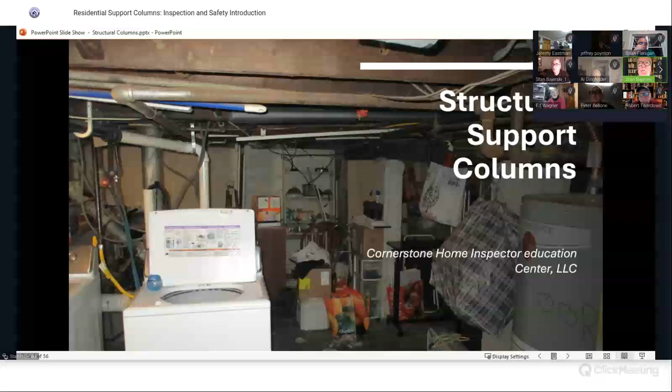Tonight we're going to talk about something that we may take for granted sometimes, but structural support columns, we see them in almost every home. So we're going to talk a little bit about them tonight.

Oh, I can control this today.

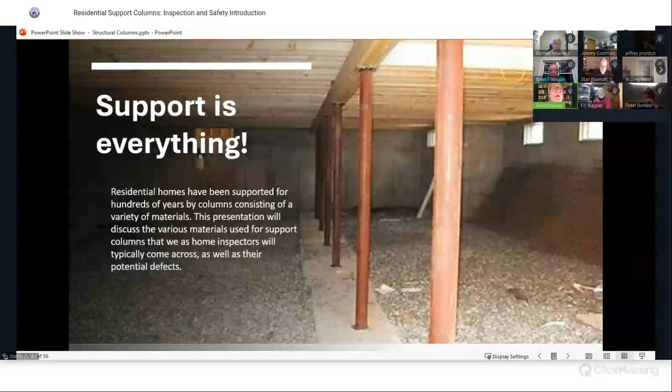All right. So support is everything. Residential homes have been supported for hundreds of years by columns consisting of a variety of materials. This presentation will discuss the various materials used for support columns that we as home inspectors will typically come across, as well as their potential defects. Column material: wood, brick, concrete blocks, steel. There's generally two kinds: concrete filled and the adjustable.

Stan, hold on. Raymond, you need to mute your microphone. Will guide us. And Raymond, please mute your microphone. Got it. Thank you. Go ahead, Stan.

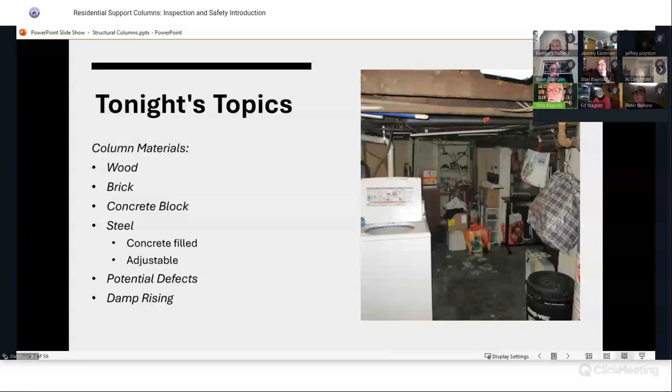And then potential defects and damp rising, which is a term you might not know, you may know. We're going to talk about that in a little bit more detail towards the end of the presentation. So a column for our purposes is defined as a supporting pillar, especially one consisting of a usually round shaft, a capital, and a base, a colonnade of marble columns. Well, they're not all like that, but that's what the definition is.

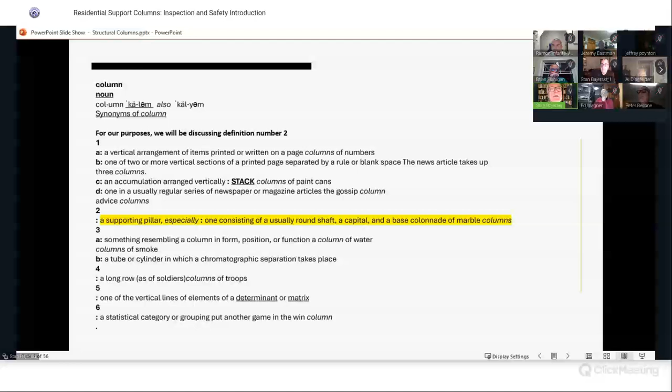And ancient Greek architecture came from the Greeks or Hellenics, whose culture flourished on the Greek mainland, and their architecture was pretty dominant with columns, as you can see here. They're decorative, but they also serve the purpose structurally. There's three orders of Greek architecture: the Doric order, Corinthian, and the Ionic orders. They were all heavily into ornate columns, so they date back quite far.

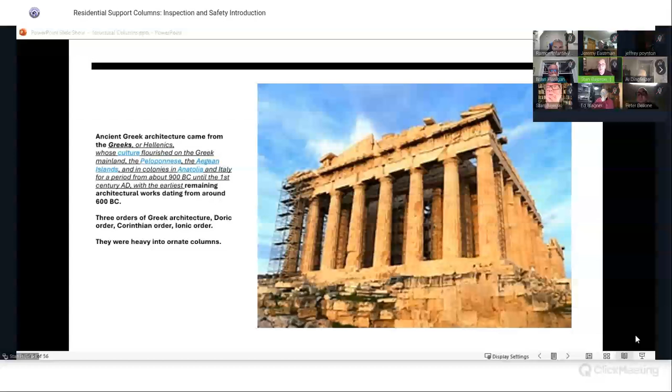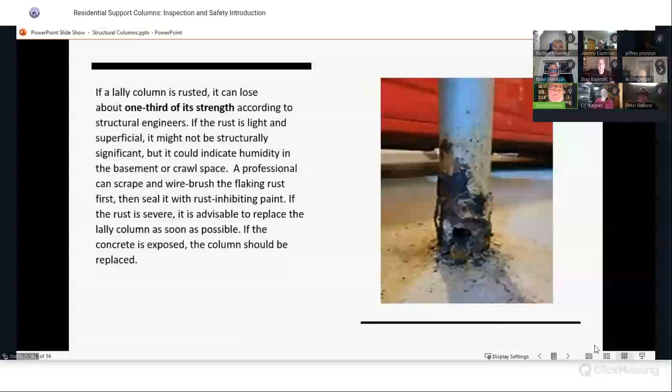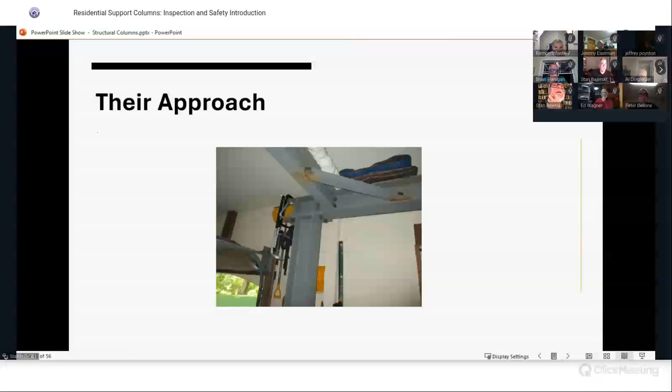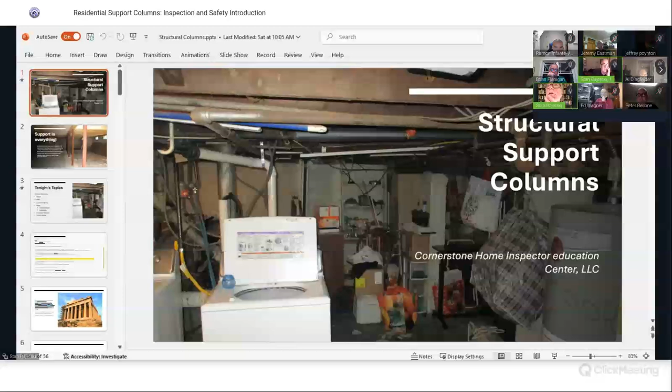All right, why is this not moving now? Jim, am I locked up here? There you go. Try it now. Try your keyboard. That's what I'm using. Okay. There you go. I got it. Hold on. Let me make sure. Yeah, you're good. Yeah, but I got to go back to where I was. Hold on. There you go. Go back the other way. Am I going the wrong way? Yes, go back the other way. There you go. Holy shit. So, yeah. Sorry, guys. Going the wrong way. There you go. So just click forward a couple. Why is my keyboard not working? All you're going to do is use your little arrow.

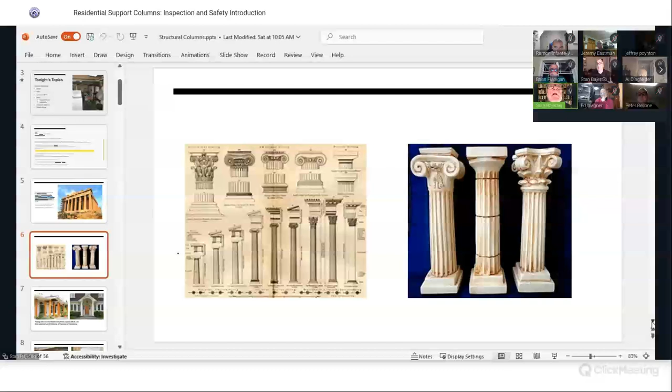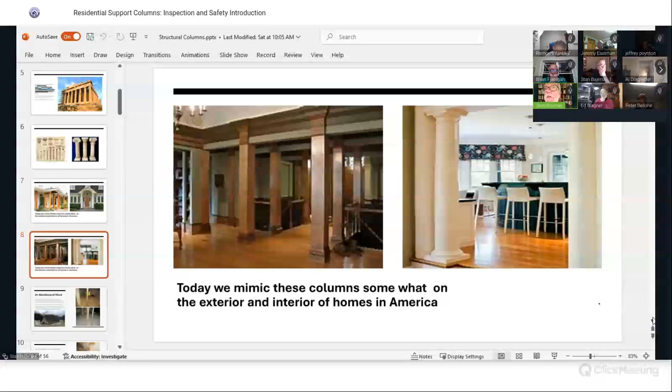There you go. Okay. Here's some pictures of the columns back then. Three different types there. Today, we mimic these columns somewhat on the exterior and interior of homes in America. Interior columns, a lot of these are probably structural, lined up over a girder in the basement. Others are just there to create the architecture that they're looking to simulate. We've probably all seen some similar to these in the early 1900s houses with the archways and openings. And back then, those weren't really exotic houses. They just put a lot of these things in there to carry over the old-time architecture.

Wood is one of the longest standing building materials in existence, with evidence showing homes built over 10,000 years ago using timber as primary source for construction material. Europe's Neolithic longhouse, a long, narrow timber dwelling built in 6000 BC, is an excellent example. As one of the largest buildings during that period, the Neolithic longhouse was solid and massive with a capacity of housing around 30 people. And this was all supported by wood columns and wood timbers.

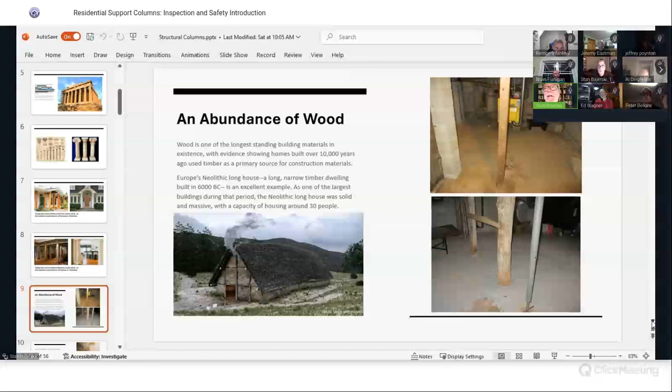And we'll see in early homes a lot of wood columns. Sometimes they have been replaced or working with replacement columns or additional columns. Here are some of the originals in this house. They were just timbers, bark taken off and slapped into place. And they probably still are functional. I still see them a lot in some of the beach cottages that I crawl under here on the coastline in Connecticut. They're usually cedar, and a lot of them are still in place, believe it or not.

So we as home inspectors see wood columns in homes built into the 1930s. Many are the originals and are faring well. Most concerns for wood columns deal with moisture and insects. If the base of the columns begin to rot due to chronic dampness or seepage, they will compress and the structure will follow. Insect damage can compromise a wood column as well.

If I had to guess, I probably see more decay problems with wood columns than insects. I do know I've seen insect damage to columns more in crawl spaces than basements. While the majority of wood posts are still functional, many inspectors advise that they be replaced with steel lally columns.

I would have to see the condition of the columns and the structure to decide if I wanted to make that recommendation. I'm going to say probably 80% of the time they're going to have some type of water staining or dampness staining on the bottom. So you got to probe them, see if they're solid, and then go from there with your recommendation.

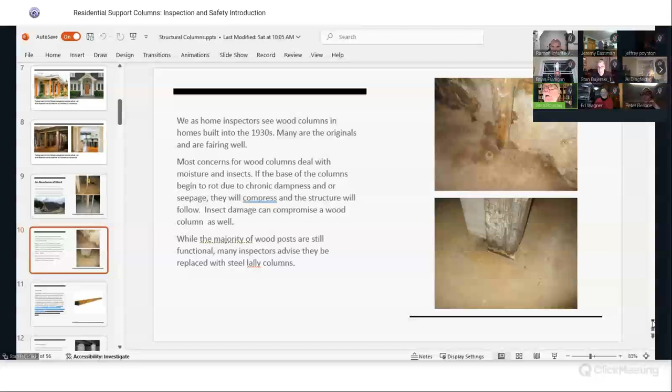Versalam columns, laminated veneer columns manufactured by Boise Cascade. They are highly suitable for wood columns. They have the same properties that make Versalam beams great. They are free of deep checks, cracks, or twists that can plague solid wood columns. The allowable axial load for the Versalam columns varies depending on the size of the column and length of the column. You can find more information on Versalam columns on the Boise Cascade website.

So several years ago now, Scott and I got a call from a realtor that I worked with who manages a few properties as well. Her owner lives in Florida, and there was a rental property in West Haven, and one of the tenants said the addition was falling, and she asked me if I would go take a look at it. So Scott and I did.

So there was an addition off the side of the house, 2-story, and it did appear that the floor joists were pulling away from the main. Actually, it wasn't even a girder; it was the sill box that was the original part of the home. So we decided to build a girder under those floor joists, and we used an engineer to spec out everything for us. And he chose these guys as the columns. We had 3, I believe, across the length of that house; it was a 24-foot span, and we put 3 columns up.

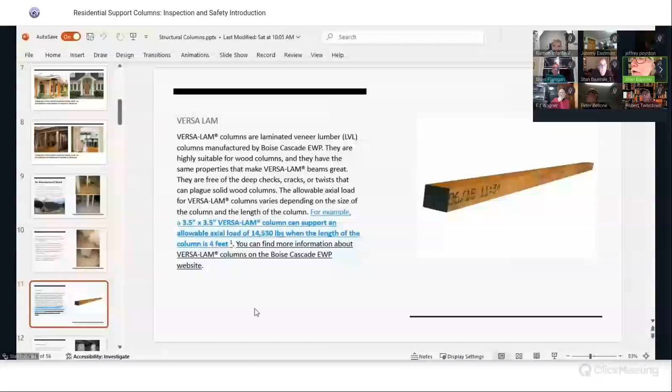You have to have the engineer make that correction. And I said it's going to cost more money for this woman, and I don't even have to get a permit. I can do this job without a permit. And he approved it and gave it back to me, and we put that all in. And it wasn't the beam he was concerned about. It was the strength of the concrete, which was just an error on the engineer's part. So sometimes you have your way with the building department as well. You don't get in their face, but you kind of tell them where you're coming from.

So concrete block I see a lot, especially in crawl spaces like this, and they usually look pretty suspect for the most part, and they are built up usually with different sizes of block and then wood shims because the floor is never level, so they're always going to be different heights. That's another thing that you have to kind of look at, and you have to get a feel for whether that's going to be substantial or not. How old is the house? How long has this been here?

Concrete block columns are used as load-bearing components inside the perimeter of the home. These columns are usually made of concrete masonry units. We commonly refer to them as concrete block or cinder blocks. The lifespan of concrete columns can vary depending on the type of the concrete used, the quality of the installation, and the environmental conditions they are exposed to. Precast concrete columns are designed to have a lifespan of 50 years. However, the lifespan of concrete masonry units used in older homes can be much longer, up to 100 years or more.

It is important to note that the lifespan of concrete columns can be affected by factors such as moisture, temperature, and exposure to chemicals. If you have any concerns about the structural integrity of your concrete columns, it is advisable to consult a professional contractor or engineer. So that's something that we also do, right? We recommend that when we're not sure of how things will fare.

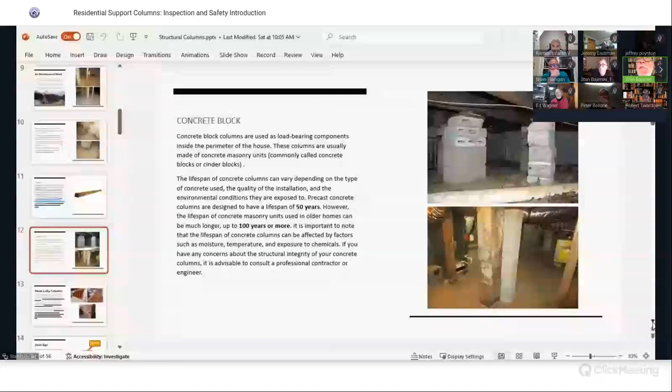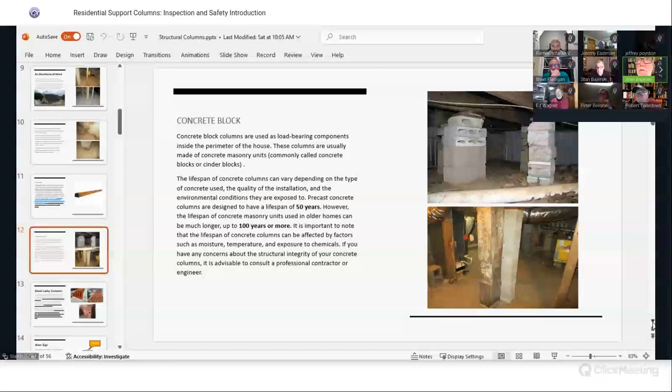That picture on the bottom is just sistering that original wood column with a block column, and you can't really see it, but there's brick at the top of that to take up the space where the columns didn't reach the girder.

Steel lally columns. The most common column in modern construction is the lally column. A lally column is a type of structural support column that is used to provide support to beams or timbers stretching over long spans. It is typically made of thin-walled steel and filled with concrete.

Lally columns can be used temporarily to hold up extremely heavy structural weight when performing other repairs, such as major wall remodels or installation of new windows or doors. Permanent lally columns are sometimes installed to correct structural problems as well. The oldest form of lally column is a non-adjustable steel column cut down to size and filled with concrete. However, the term has come to encompass many other iterations of mobile steel columns.

Adjustable steel columns, telepost, jack post. Adjustable columns consist of two telescoping steel tubes, one inside the other, that adjust upward or downward to temporarily or permanently support an unsupported joist or beam. There are also three-piece as well.

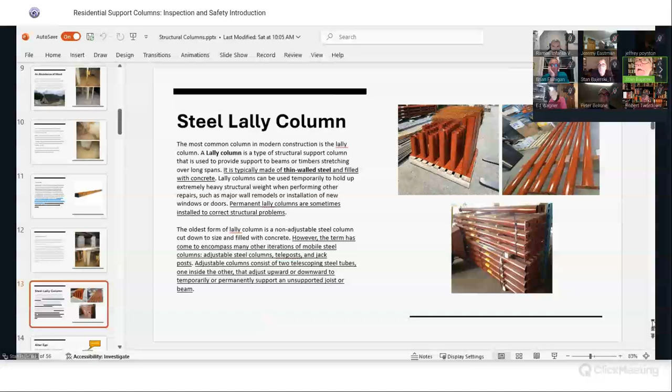These are just a stack. You see the different sizes that you can buy. You can buy one big long one, cut them down to where you want. They're not easy to work with, and you better be precise when you cut those down if you're installing them to replace an existing column. The wood was easy to work with, the lam beam.

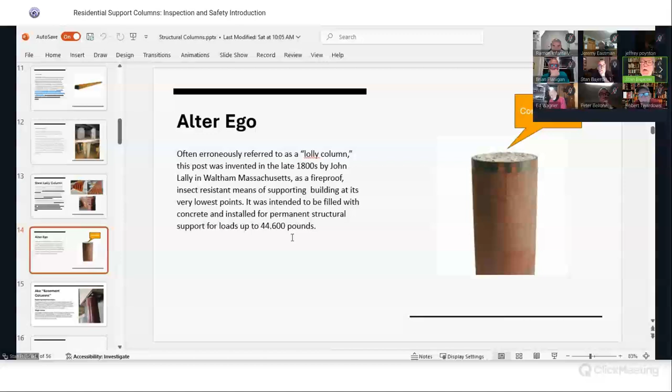Lally columns have an alter ego. Lots of people refer to them as lolly columns. And this post was invented in the late 1800s by John Lally in Waltham, Massachusetts, as a fireproof, insect-resistant means of supporting buildings at their very lowest points. It was intended to be filled with concrete and installed for permanent structural support for loads up to 44,600 pounds. That's a lot of weight.

So now a lot of people call them basement columns, although they're not always located in a basement. The basement columns are there to support the dead and live weight of the internal parts of your home above them. You might not realize this, but basement metal columns hold tremendous loads. A 4-inch steel column at 6 feet in height can support more than 20,000 pounds, which is a lot of weight.

That weight is the dead weight of the flooring, the floor joist, and the joist girder beam, plus the live weight of furniture and the house inhabitants. The load of the floor goes to the joist, then from the joist to the joist girder beam, and through it to the basement beam and into the foundation and the walls.

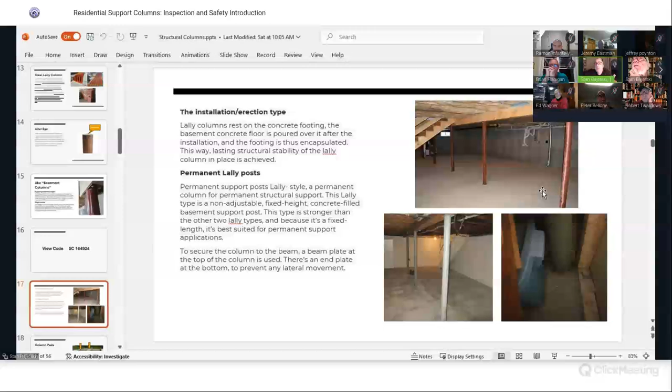It depends on what you're trying to hold up. If a floor joist is sagging, there's no weight on top of that floor joist. There isn't a piano causing it to sag. So if you're just trying to push up a floor, you probably don't need a footing. Gotcha. Because you're in a basement, my understanding is you don't have to worry about freeze and thaw, so you don't have to go 48 inches like you would for a deck outside. No, it's just a pad. Okay. All right. Thanks.

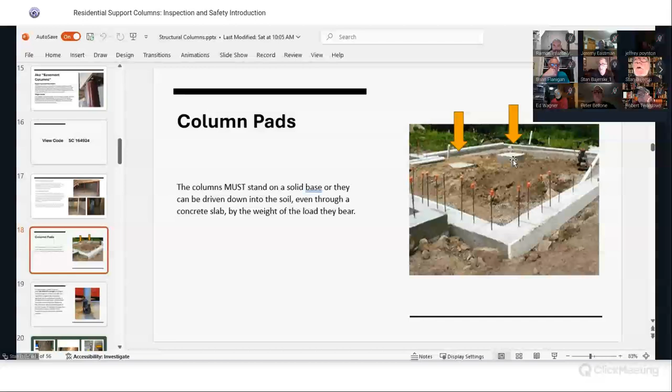Just like this. This is a bad example, I couldn't find a better one. It doesn't really give you any depth or dimension, and it looks offset, but it's the only picture I could find to depict what we're talking about. This is where the columns would go, I'm guessing. Because if we don't have something to hold them up, you'll drive them down.

So if the Lally column is rusted, it can lose about 1/3 of its strength, according to structural engineers. If the rust is light and superficial, it may not be structurally significant, but it could indicate humidity in the basement or crawl space. A professional can scrape and wire brush the flaking off first and then seal it with a rust-inhibiting paint. If the rust is severe, it is advisable to replace the Lally column as soon as possible. If the concrete is exposed, the column should be replaced.

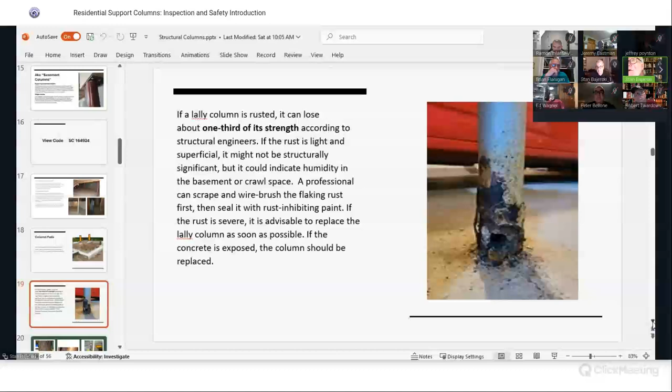So I kind of live by that. If I see concrete exposed at the base of a column, I'm writing up that that column has to be replaced. A little bit of rust is not a big deal, but why is it rusted? So this is in a garage, you can see the car. Water, snow melt, probably hitting that column all winter long, or even summer. At least you know what the source may be here. I've got a picture, so we'll wait until we get to that.

If you walked into that basement looking for evidence of dampness and seepage, you didn't see much there. But where is this water coming from? It's being wicked up from underneath that slab.

Is this going to continue and become worse? Unfortunately, I don't remember how old that house was, so how are we supposed to know that? How do you want to write that up? If it gets worse, replace it.

One way to handle that, if you think moisture's under that slab, is put a sump pump in and try to collect that water and pump it out. But then don't you think you'd see water efflorescence someplace else as that slab got wet? So these kinds of things are a little tricky when you see them, as to determine how that water got up there, but it's definitely wicking, and this is just pretty bad right there.

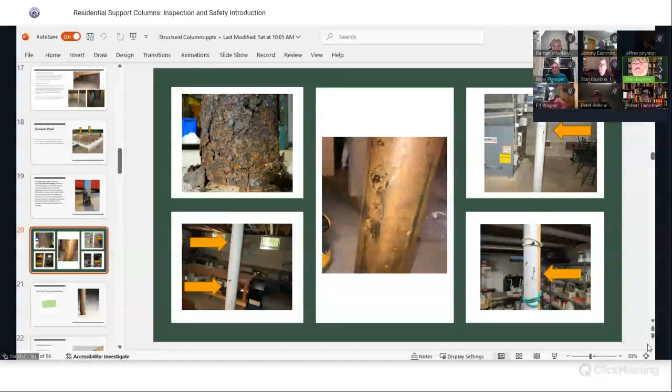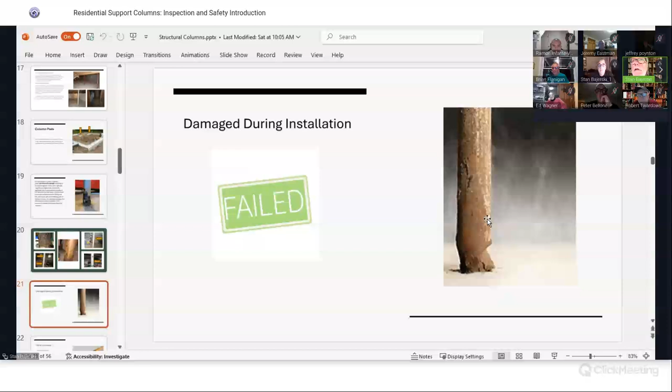Damage during installation. Somebody sledgehammered this thing to get it into place, it looks like. And that's a failed column. It's not supporting 100%. That should be replaced.

Other concerns besides rusting and damaged columns: spacing of the columns. Typically a steel column is placed every 8 feet on center in a wood frame 2-story residential home. I used to think they were all supposed to be under a splice, but when you look at some of these, the splices are offset.

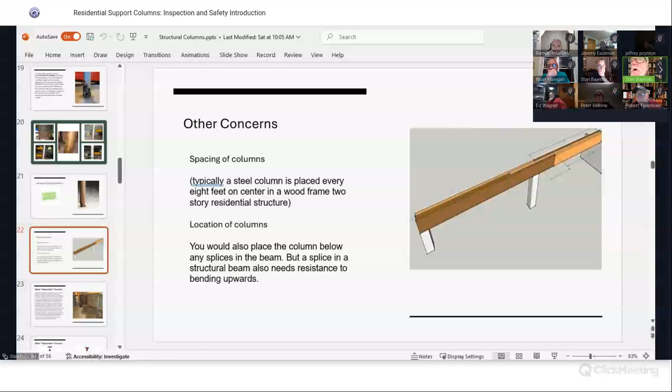And if you support it at the wrong spot, the wood can kind of lift, so you also need to be resistant to bending that splice upwards as well. It's not a big deal, but it'll be a little hump in the floor. You may feel it as you walk through the house.

I don't know how many times people find steel Lally columns problematic unless they're badly rusted, but I see adjustable columns a lot. And if they're under, like I was talking with Jim before, underneath the floor joist, or an area like if you walk through a dining room and they have a china closet.

So I'm a big guy. When I walk through a room that has a china closet, those 2x8 floor joists are shaking the shit out of those dishes.

It's not a structural issue, because if you wanted to do the calculations, that 2x8 was probably fine. But every floor joist is weakest at its center, and it's going to vibrate. So you can put a couple of these underneath there if you don't mind compromising the open space of your basement, and it'll take that vibration out.

But when you're supporting the house with one of these or several of these, then the concern develops. Telescoping columns designed for use in the United States, also known as teleposts, sectional columns, double section columns, jack posts, or jacks, should be reported as temporary columns that should be replaced with permanent columns.

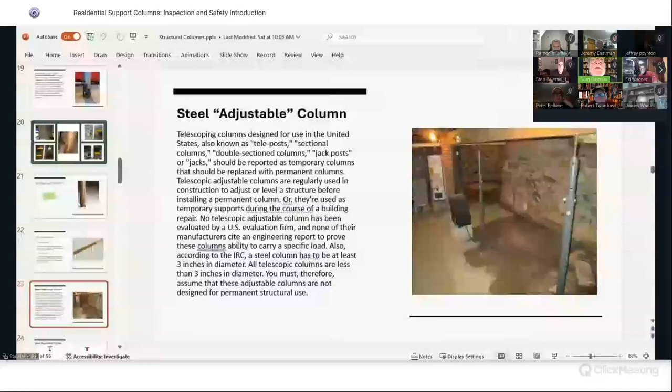Telescopic adjustable columns are regularly used in construction to adjust or level structures before installing the permanent column, or they're used as temporary supports during the course of building repair. No telescopic adjustable column has been evaluated by a U.S. evaluation firm, and none of their manufacturers cite an engineering report to prove these columns' ability to carry a specific load. They're basically a tool.

Also, according to the IRC, a steel column has to be at least 3 inches in diameter. All telescopic columns are less than 3 inches in diameter. You must therefore assume that these adjustable columns are not designed for permanent structural use. I have pictures at the end that'll show you what can happen with them. But if this isn't 3 inches, this certainly is not. And that's what we're supporting.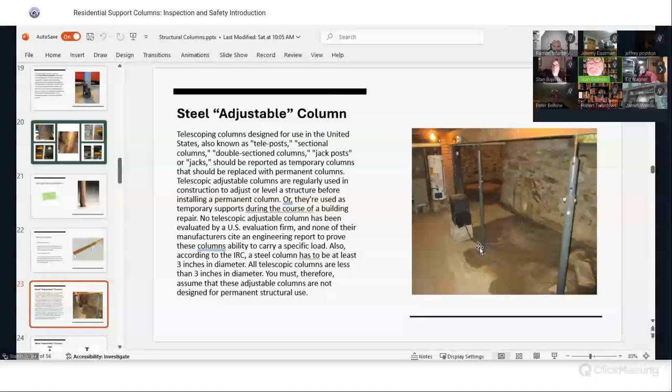This was one story here, I think, in this house. I believe this was a very old house. There was wood here, and there was a couple pieces of wood left back here too. So I call these out to be replaced. Now, does it mean somebody ran down there when they got out of the moving truck and replaced them? Probably not. They're probably still there.

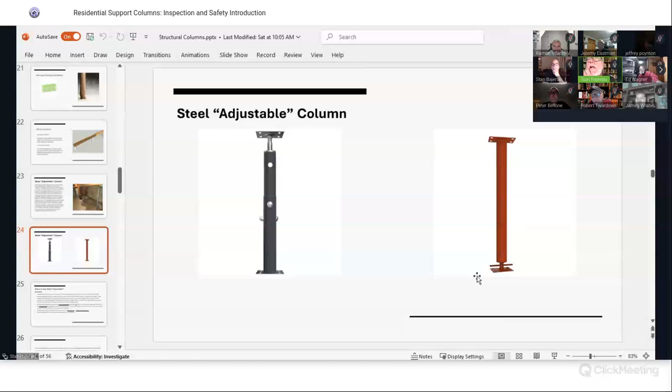Adjustable Lally columns are easy to use as they simply slide in place and adjust to fit the space. Can't be any easier. Adjustable columns typically range from about 3 feet to 14 feet tall. The shorter the column, the greater the weight it will support. For example, a 6-foot-long, 4-inch diameter column has a maximum weight rating of 21,300 pounds. Increasing the length of the column can drop its weight rating to 10,000.

Non-adjustable steel columns require more prep work as they must be cut to fit within a given space. During remodeling, when an interior load-bearing wall is removed, a series of Lally columns will be put in place of the removed wall to keep the house structurally sound. These posts will later be removed when the wall is rebuilt or another type of bracing is installed, such as a beam. Short jack posts are often placed in crawl spaces and basements to correct sagging floors. Temporary... projects that need quick shoring up and easy removal.

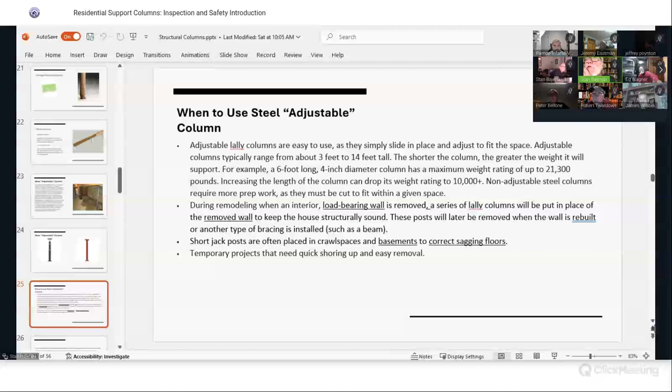I'm sure we've all seen them in place permanently. There's a development here in Connecticut. Their ranches, they're probably fine. They were built originally with them.

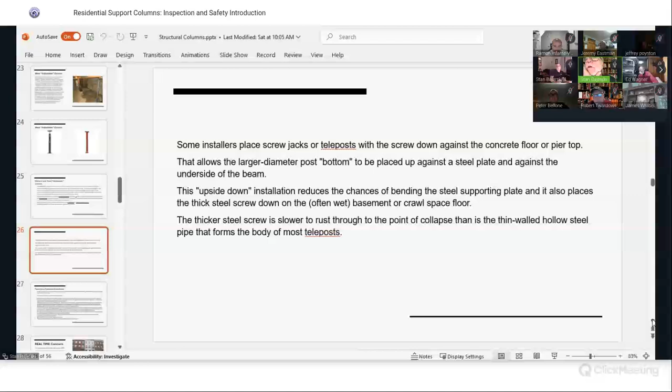They were kit houses. Some installers place screw jacks or teleposts with the screw down against the concrete floor or pier top. That allows the larger diameter post bottom to be placed up against the steel plate and against the underside of the beam. The upside down installation reduces the chance of bending the steel support plate. It also places the thick steel screw down on the often wet basement or crawl space floor. The thicker steel screw is slower to rust through to the point of collapse than is the thin-walled hollow steel pipe that forms the body of most teleposts. So there's a method to their madness.

So potentially defective conditions. The post is less than 3 inches in diameter. According to 2012 International Residential Code, columns, including adjustable steel columns, shall not be less than 3-inch diameter standard pipe. Poles smaller than 3 inches violate the IRC, although they are not necessarily defective. A 2.5-inch post may be adequate to support the load above it, while a 4-inch post can buckle if the load exceeds the structural capacity of the post. So everything needs to match up. Structural engineers, not inspectors, and I believe they're talking about municipal inspectors, not us, although we're probably included in there, decide whether adjustable steel posts are of adequate size.

The post is not protected by rust inhibitive paint. All surfaces inside and out of steel columns shall be given a shop coat of rust inhibitive paint, except for corrosion-resistant steel and steel treated with coatings to provide corrosion resistance. Inspectors will not be able to identify paint as rust inhibitive. In dry climates where rust is not as much of a problem, rust inhibitive paint may not be necessary. Visible signs of rust constitute a potential defect.

The post is not straight. According to some sources, the maximum lateral displacement between the top and bottom of the post should not exceed 1 inch. So what they're saying is there is some acceptable leaning, believe it or not. However, the tolerable lateral displacement is affected by many factors, such as the height and diameter of the post. The post should not bend at its middle. Bending is an indication that the column cannot bear the weight of the house. I would say that's true.

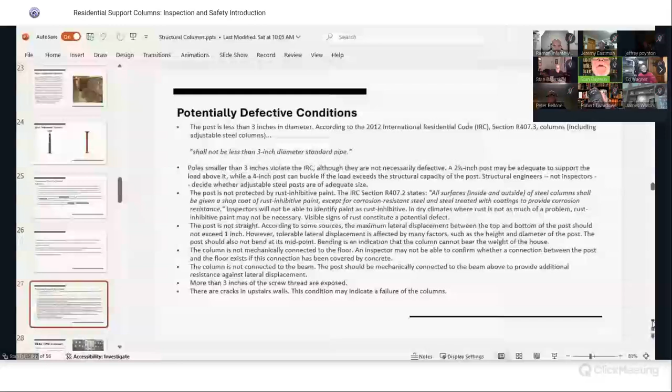The column is not mechanically connected to the floor. An inspector may not be able to confirm whether a connection between the post and the floor exists if this connection has been covered by concrete. The column is not connected to the beam. The post should be mechanically connected to the beam above to provide additional resistance against lateral displacement. More than 3 inches of the screw thread are exposed. There are cracks in upstairs walls. This condition may indicate a failure of the columns.

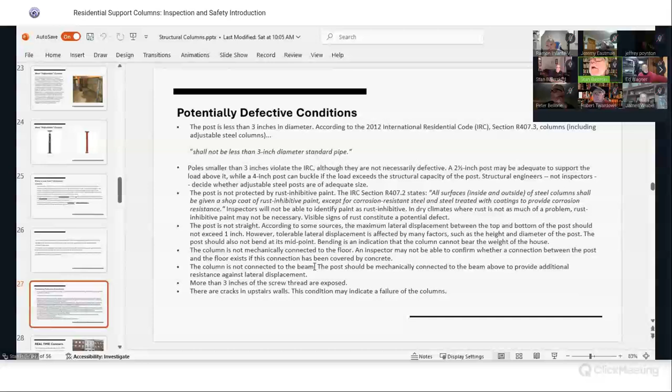So cracks can develop by pushing up on them, and they could also develop by sagging. And if you are inspecting a house where the primary support are these columns, before you make a definitive comment on them, I would look around the rest of the house and see if you see anything else that's indicative of, doesn't need to be a critical structural failure, but sagging and things of that nature that will help you make the call a little bit better.

So this is a house I did, I don't know if last year, maybe 2 years ago. This is in New Haven, Connecticut. This is an 1870 row house, 4 stories high. So the 3 stories you see there, and then the one that you barely see is the first floor, and then there's a basement under that, believe it or not.

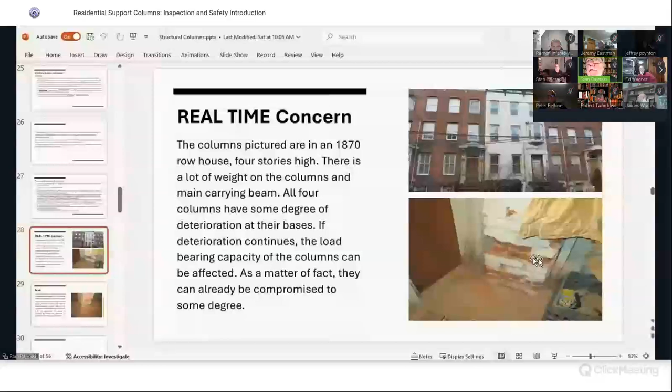All 4 columns, they were brick, have some degree of deterioration at their bases. If deterioration continues, the load-bearing capacity of the columns can be affected. As a matter of fact, they can already be compromised. So if you look at this column here, the brick is essentially disintegrating. The mortar joints are gone here, but the brick is really in bad shape here, and they all were similar to this. Here's another one.

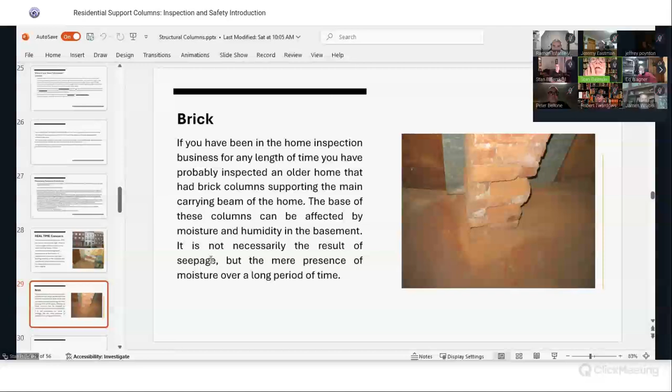If you have been in a home inspection business for any length of time, you have probably inspected an older home that had brick columns supporting the main carrying beam of the home. The base of these columns can be affected by moisture and humidity in the basement. It is not necessarily the result of seepage, but the mere presence of moisture over a long period of time.

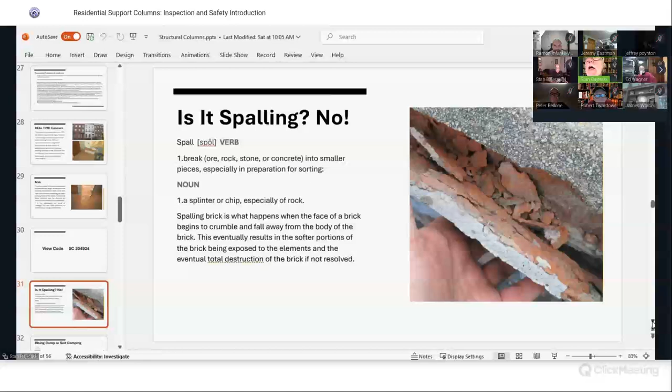So what we saw in that picture, is that spalling? No. Spalling is defined as breaking into smaller pieces, especially in preparing for sorting. This is spalling, where the brick actually looks like it's sliced, it's in pieces, chunks, so to speak. And spalling can happen anywhere. It can happen on a chimney, up on a roof, or in a brick wall. And if the moisture is not stopped, it's very destructive.

But there is another similar type of situation, and it's called rising damp or salt damp. It's a noun, and it's British. It refers to moisture absorbed from the ground into a wall. Spalling is more of a flaking or slicing effect, whereas rising damp is caused by moisture absorption and can occur at any level in the brickwork, even high up in a chimney. The disintegrating of brick, like in those previous pictures, is likely caused by salt damp or rising damp.

As porous masonry absorbs water from the ground, it is also absorbing salts. Salts are harmless underground where they stay wet and stable, but above ground, when the moisture evaporates, they crystallize and harden. They increase in volume upon hardening, at which point they cause damage to the brick from the inside out. This type of damage is usually at ground level, as in these column bases, and can rise above the ground about 1 meter or approximately 3 feet 4 inches.

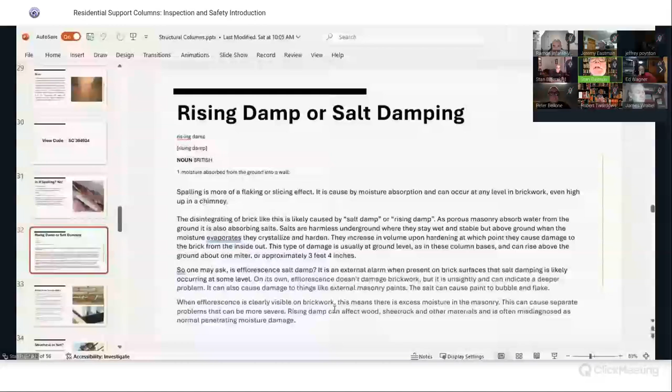So one may ask, is efflorescence salt damp? It is an external alarm when present on brick surfaces that salt damping is likely occurring at some level. On its own, efflorescence doesn't damage brickwork, but it is unsightly and can indicate a deeper problem. It can also cause damage to things like external masonry paints - the salt can cause paint to bubble and flake. When efflorescence is clearly visible on brickwork, this means there is excessive moisture in the masonry, which can cause separate, more severe problems. Rising damp can affect wood, sheetrock, and other materials, and is often misdiagnosed as normal penetrating moisture damage.

So we're off the column thing, but I just want to get into this a little bit more. Rising damp is caused when groundwater travels up through the building materials of a home. The capillary action is usually stopped by a damp-proof course. In this picture, there's felt paper put across here, and that'll prevent it from going any higher. The damp-proof course, DPC, is intended to block the moisture that is rising through the capillary action. It should stop moisture before it reaches high enough to cause internal damage.

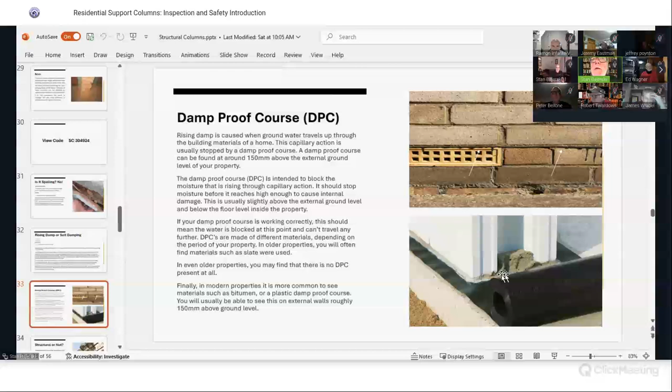This is usually slightly above the external ground level and below the floor level inside the property. If your damp-proof course is working correctly, this should mean the water is blocked at that point and can't travel any further. DPCs are made of different materials depending on the period of your property. In older properties, you will often find materials such as slate were used, and in even older properties, you might find there is no DPC present at all. In modern properties, it's more common to see materials such as bitumen or a plastic damp-proof course. You will usually be able to see this externally on the external walls, roughly 150 millimeters above ground. So this is a different material here, but that's the same approach in a modern construction.

So what do you tell your clients when they ask if this is a major structural issue? This is a 4-story building. Yes, it is. They are smart enough to know that these columns are holding up the home and clearly are in less than optimal condition.

In this case, the home is 153 years old, 4 stories high, with no obvious structural distress related to the condition of these columns. I'm going to tell you that that building, at least the part I was in, was level, straight as an arrow, plumb. Those columns weren't structurally deteriorated to a point where they were affecting the building.

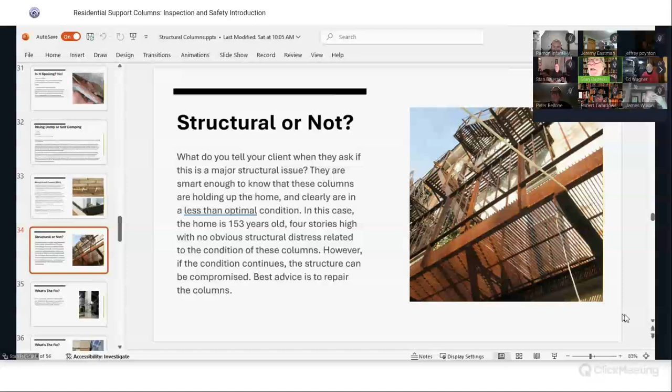If the condition continues, however, the structure can be compromised. So it took 150 years to get to that point, but I'm not walking out of that building telling them they don't have to fix that. So I said they needed to have it repaired.

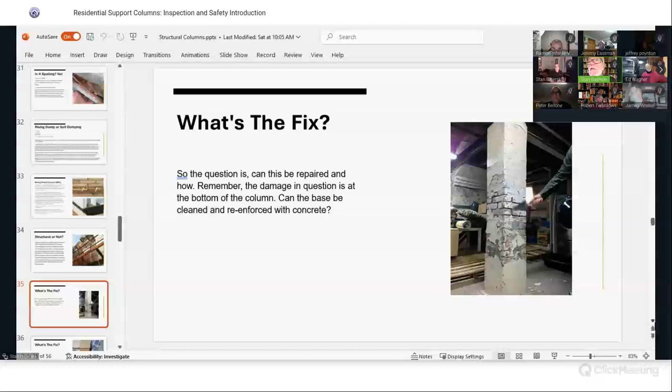What's the fix? So the question is, can this be repaired and how? Remember, the damage in question is at the bottom of the column. Can the base be cleaned and reinforced with concrete? Can we skim coat it, fill in the mortar joints? Can we chop out bricks and put them back in? Like this guy's doing here. Most of them are already out. Can a steel column be installed on either side of the columns?

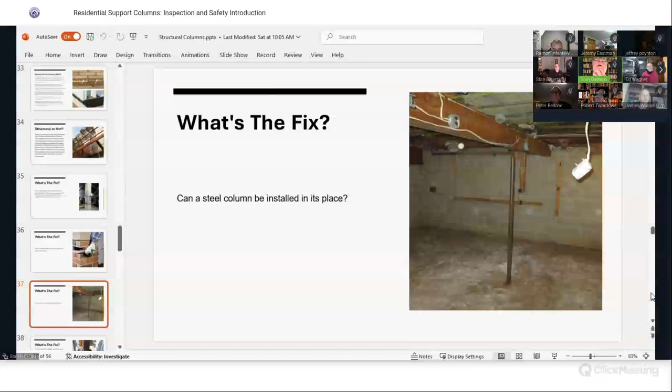I always tell people that they need to have an engineer determine stuff like that. So the buyers in this case had a mason come out who essentially recommended the installation of a steel reinforced brick column. So what they were going to do is something like this. They were going to put a steel column in and build the brick around it.

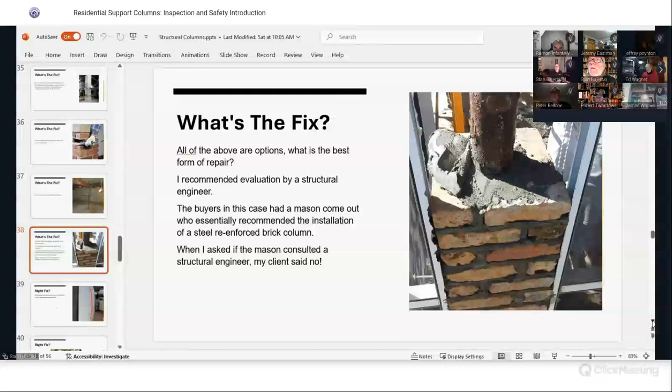I couldn't tell you, and I don't think anybody listening has a good idea of, can the column hold up the house by itself? Is the brick going to have to be built to assist the column? Is the brick being built just to match the other columns? To me, that's all the job of an engineer. So when I asked them if the mason consulted a structural engineer, my client said no. So I never heard back from them. I don't even know if they bought the house.

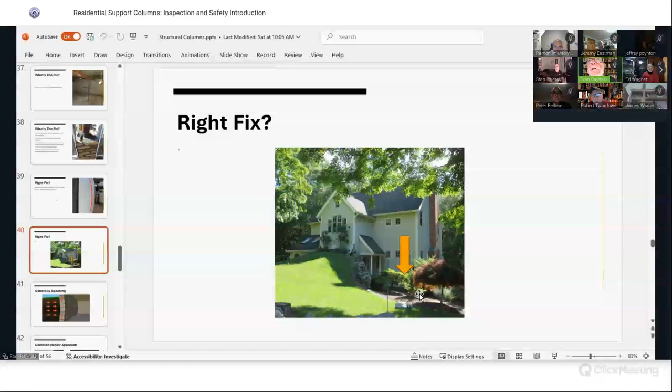This I did earlier this summer, a house in Weston, Connecticut, where the garage wall, a block wall, was bowing in a little bit. That's where it was. I don't know what this catastrophe is here. That was doing nothing to the house, but the soil, there was a retaining wall here as well, was pushing against that garage wall.

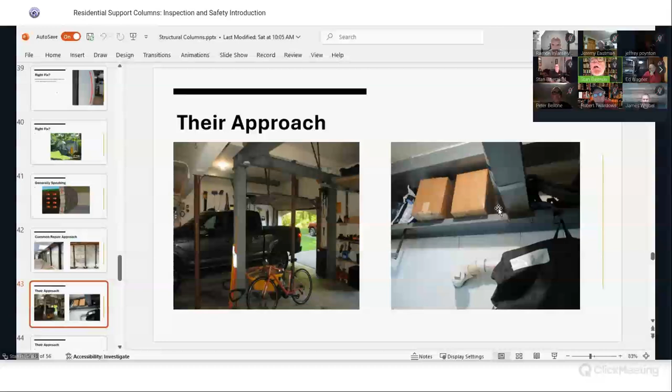In this case, though, in the house I was in, this is what somebody built. So they built this cage. There's a girder going down here, and then this wound up over here against the wall with another girder against the wall to take the pressure off the top of the wall. Massive footings. I can only imagine what was inside here to support these guys.

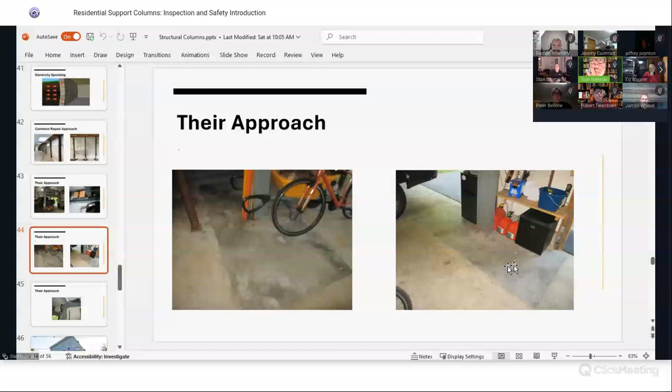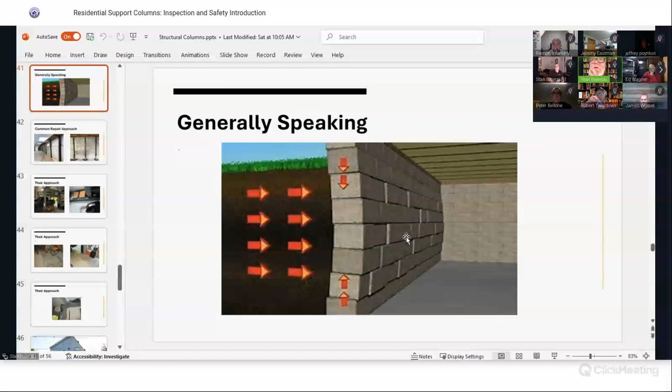But bear in mind, let me go back if I can. It was only up against this part of the wall. This wall, to me, is still susceptible to this pressure here. That's why these guys are pressing against the entire wall. That's a better fix, in my opinion.

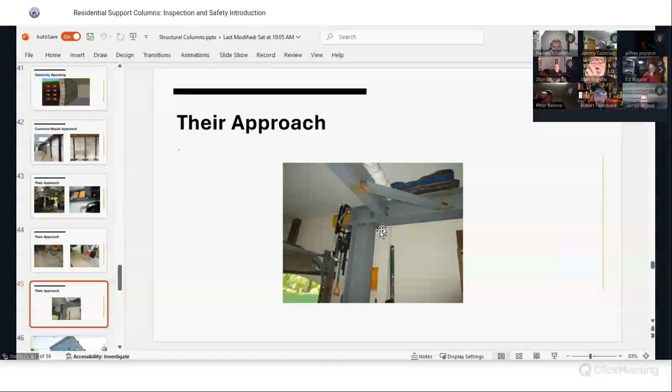So I wasn't really comfortable with all this. But I told him, I said, you know, it's best to get some kind of engineer report on what the theory was behind here. And I know that fellow bought the house. I know that for a fact.

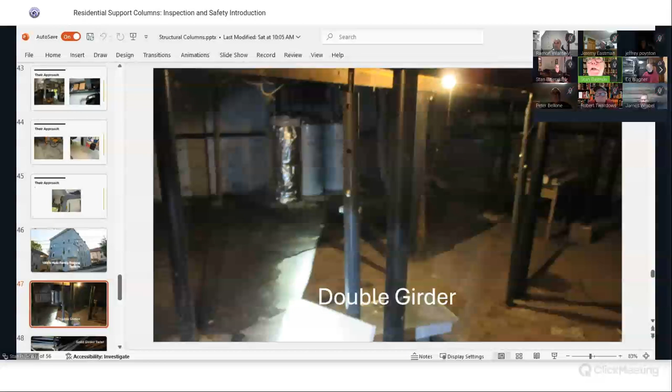So this was in another presentation we had, but I want to go through it again because it has a bunch of columns in here and they basically all failed. So this house was a 3-story house built in the early 1900s. There was a double girder, one here and one here. The first support for these girders were wood columns.

Let me get to them. They were on, the one was still in place. It's shot at the bottom. I don't know why they didn't knock it out. This one fell over and they just left it there. It was disintegrated.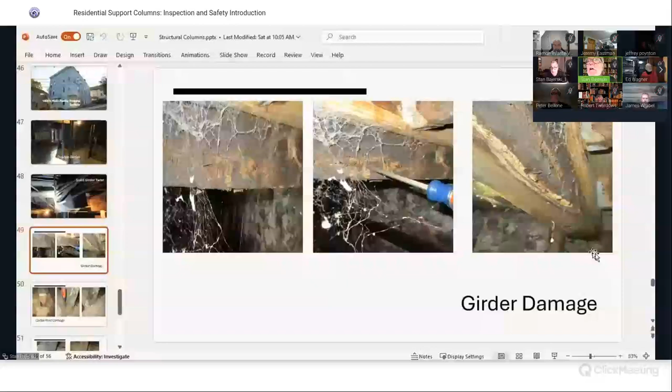The girder's twisted. Now that girder is a solid piece of wood. It probably twisted on its own. I don't think it's from the stress of the load of the building, but all this really kind of is compromising the structure here, in my opinion. Then there was rot, and this is sagging here. There was a lot of mold, a lot of water damage to wood and the joists.

So these are the kind of things that you really need to look closely at everything, because there was more than just the columns in that building that were an issue. That was an investor who was sitting poolside in Florida drinking a Mai Tai while I trudged through that wet basement and collected information for him and reported back to him. I'm not sure if he bought that house or not.

But you know, we take a lot of this stuff for granted, and I got to think a lot of guys probably, as long as that column looks straight, and there's no issues in the house, they probably don't give it a second mind. But look them over, make sure you think they're doing the job they're supposed to do. I'm sure everybody already has a way to handle all this stuff that we talked about, the adjustable jack, stuff like that. But so in summary, missing structural columns or post footings and piers.

Sometimes the builder may omit installing necessary columns or their associated footings and piers. Detecting these omissions is crucial to prevent foundation failure or damage. Proper bearing support at both the top and the bottom of the columns is essential to avoid structural collapse. So finding or determining a footing is missing, or a pad, is kind of difficult, I would say, unless there was evidence of it. The concrete is cracked or settled. Missing columns, if you walk in a basement and there's two and it's like 40 feet long, you're probably missing a column. I'm sure the girder is going to be sagging.

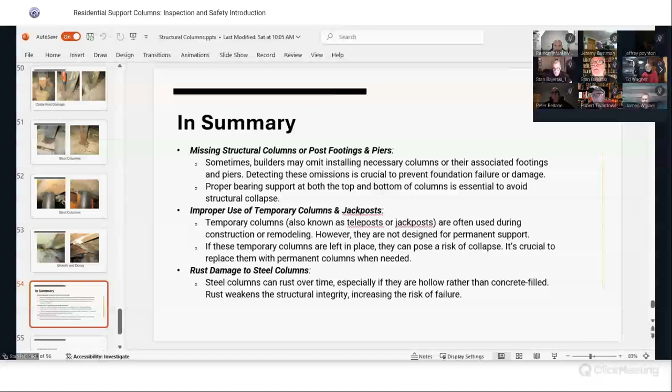And then steel columns can rust over time, especially if they're hollow rather than concrete filled. Rust weakens the structural integrity, increasing the risk for failure. I think that's the last, one more, okay. Insect damage to wood columns. Check wood columns for termite, carpenter ant, and powder post beetle damage. Moisture damage to masonry and wood columns. Check masonry columns for evidence of deterioration due to moisture. Check wood columns for decay.

Connection failures. Pay attention to the connections between the columns, beams, and piers. Connection failure is often a weak link in residential structures. Properly designed and secured connections are crucial to prevent movement and collapse. Choosing the right steel column. When selecting steel columns, consider factors such as load-bearing capacity, material type, and intended use. Two-piece telescopic posts are not suitable for permanent support. If used as such, they should be replaced with permanent columns.

So we're a little early. Anybody have any questions about or any comments they want to add? Any personal experiences that they've come across regarding columns, defects, the telescoping columns? We got to kill at least 5 minutes.